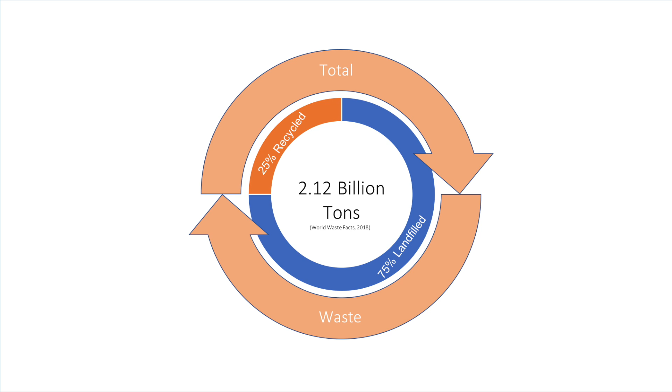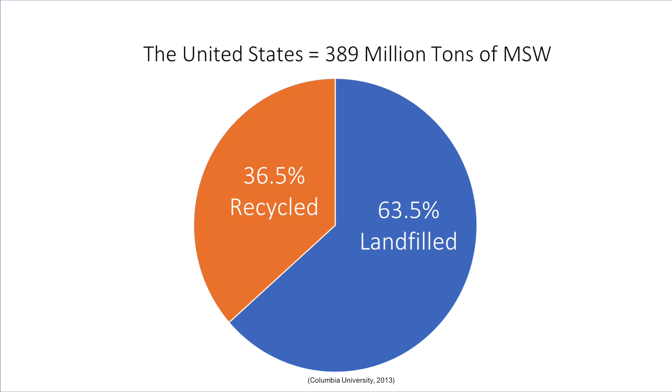The United States alone generates 389 million tons of municipal solid waste per year, with approximately 63.5% being landfilled. As population growth and waste consumption increase, the available space for landfills becomes less. The current state of landfills also poses a threat to the environment.

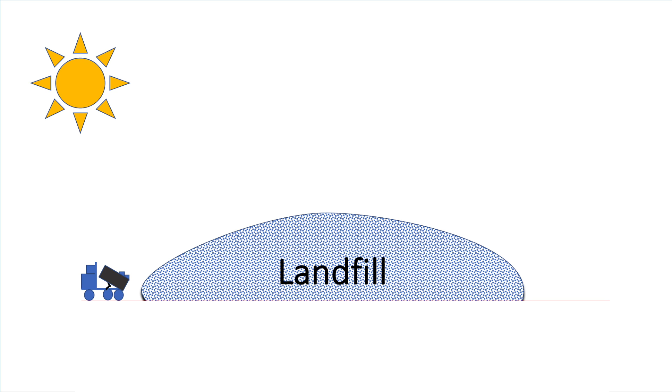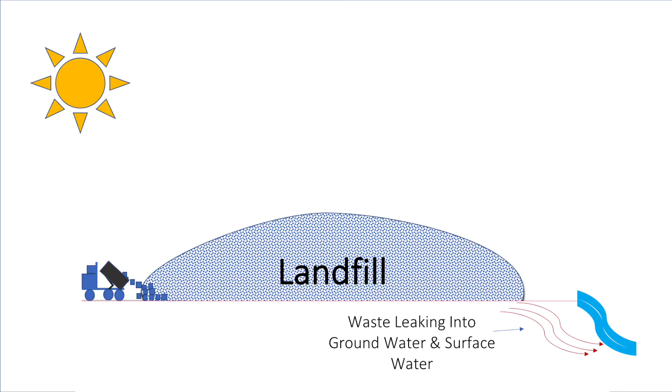Methane gas, a byproduct of waste decomposition, is a greenhouse gas. Also, leaching waste may pose a threat to surface water and groundwater. As far as we know it, packing everyone up and shipping them to another planet is not an option. Also, living on a mountain of trash is not ideal either. Gasification offers a relatively simple solution to the problem at hand.

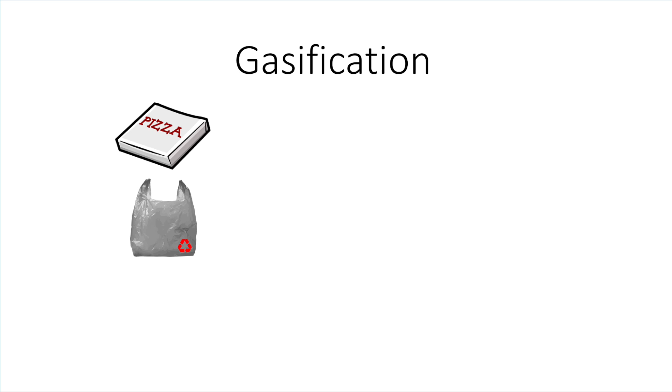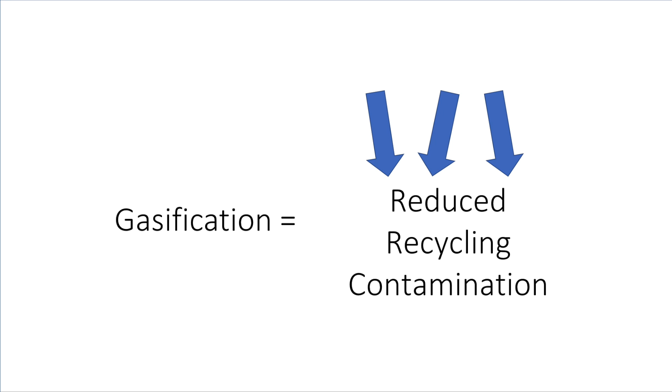Gasification is the process of taking everyday household items such as pizza boxes, plastic bags, and styrofoam and turning this material into clean, reusable energy known as syngas. As far as the disposal routine within each community, the gasification process offers no real difference. In fact, gasification may offer a solution to the current recycling contamination issues set forth by China's Green Fence policy.

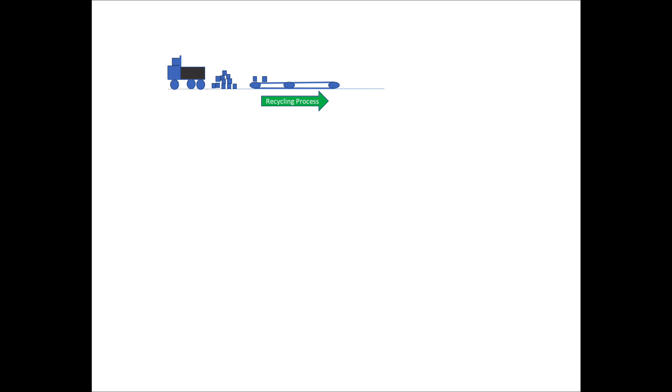At the gasification facility, a truck carrying a week's worth of municipal solid waste will dump all its contents onto the tipping floor. The material is then loaded onto a conveyor belt where the recycling process can begin. All eligible recycled material, such as paper, metal, and plastic, are separated out and baled for future repurposing.

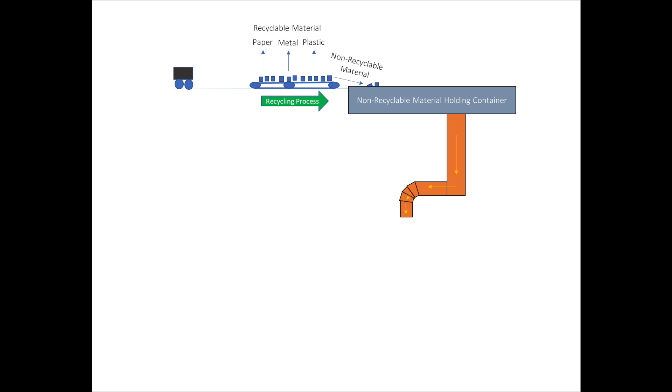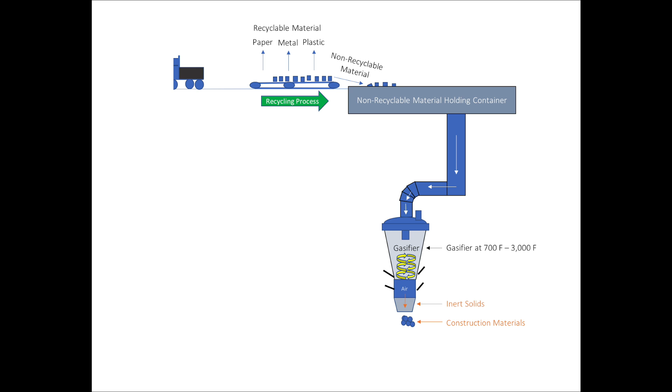The non-recycled material is then placed in a non-recycled material holding container where it dries out and waits to be processed through the gasifier. Once the material is within the gasifier, inert solids pass through and can be used for construction material. The gas then rises up containing carbon monoxide, nitrogen oxide, hydrogen, carbon dioxide, and sulfur oxide.

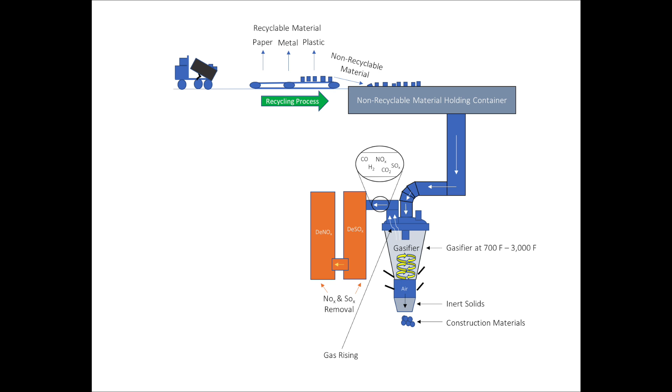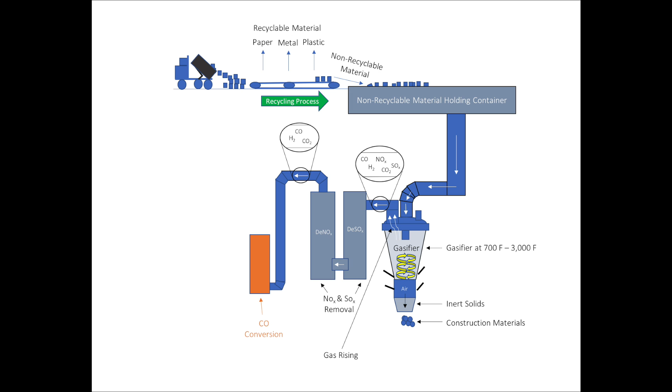The gas then passes through DeSOx and DeNOx systems that remove the nitrogen oxide and sulfur oxide. After passing through these two containers, the gas contents are now only hydrogen, carbon dioxide, and carbon monoxide. The carbon monoxide is then converted into carbon dioxide. Carbon dioxide is then captured and stored while the hydrogen keeps passing through and turns into electricity.

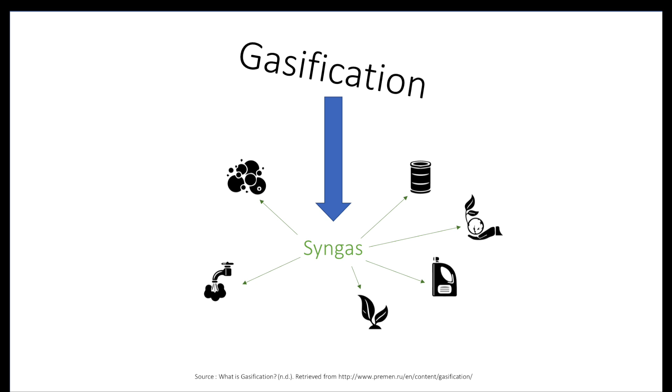The final product of the gasification process can be used for steam, hydrogen for oil refining, consumer products, substitute for natural gas, chemicals, fertilizer, transportation fuels, and power. The gasification process closes the loop to the waste issues associated with our consumer-based society.

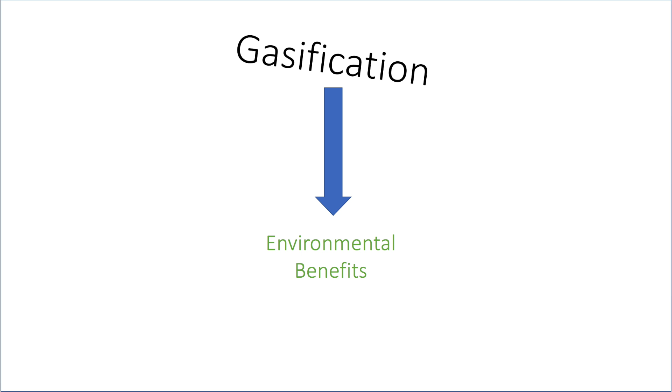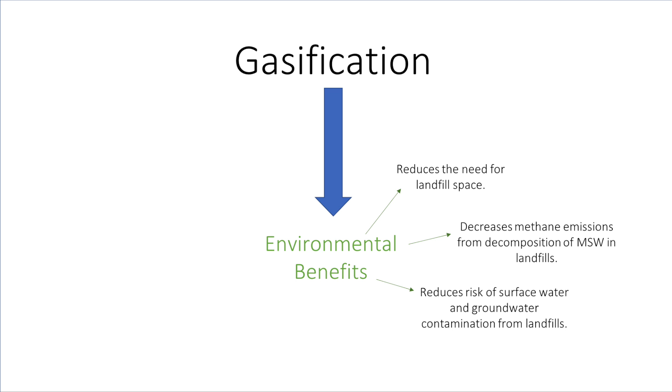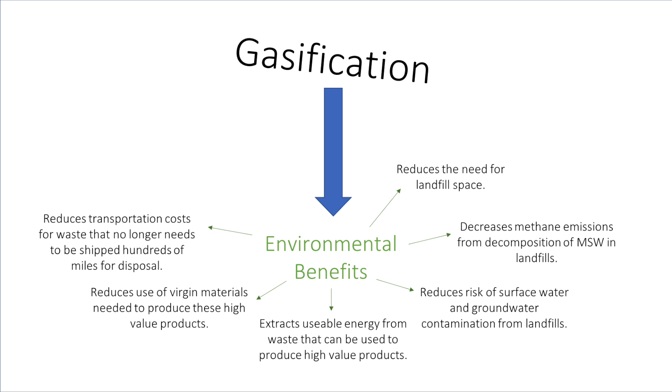The environmental benefits associated with the gasification process are: it reduces the need for landfill space, decreases methane emissions from decomposition of municipal solid waste in landfills, reduces risk of surface water and groundwater contamination from landfills, extracts usable energy from waste that can be used to produce high-value products, enhances existing recycling programs, reduces use of virgin materials needed to produce these high-value products, reduces transportation costs for waste that no longer needs to be shipped hundreds of miles for disposal, and reduces use of fossil fuels.

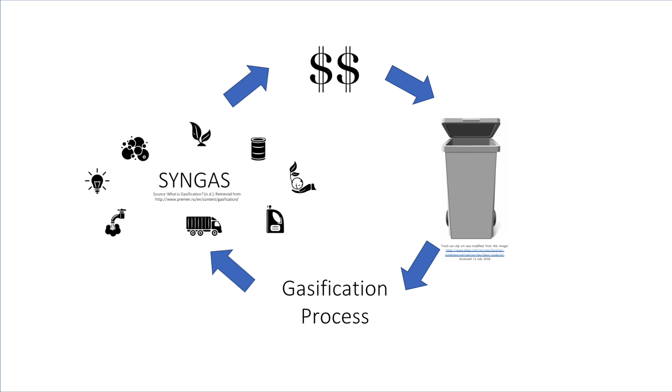The linear process of consume, dispose, and landfill needs to be reevaluated and redesigned. The rapid consumption and disposal of industrial waste and household waste is no longer something that can be pushed to the curb and forgotten about. Although the initial cost of the gasification process is high, the end results provide a closed-loop solution that eventually will result in financial gain.